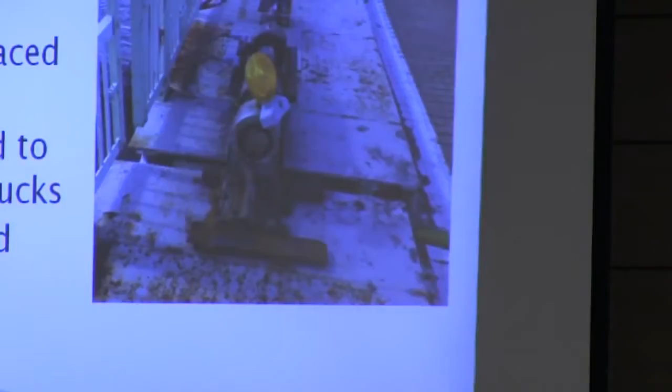We then restricted traffic on the bridge to 2 lanes, took away all the commercial traffic, heavy trucks off the bridge. We posted cops at both ends of the bridge to prevent trucks from getting onto the bridge because there is a potential for residual settlement on the bridge.

I'm just kind of giving you a history of what's going on, where we're at, and a presentation of what's going to happen, at the end of which we'll open it up to questions.

On January 14th, when we realized we had so much settlement on the East Pier, we moved construction away from the East Pier to analyze what's going on there. We moved to the West Pier, on the west side of the bridge, southwest side, close to the marina. We started work there on January 14th.

On January 23rd, we noticed that there was settlement of this pier as well. One indication of this is that the locks on the bridge, the ones that we put in the sidewalk, started to malfunction again. They don't open, so they can't pull back, and the bridge can't go up into the upright position. So we had to do some work on those locks as well to adjust them.

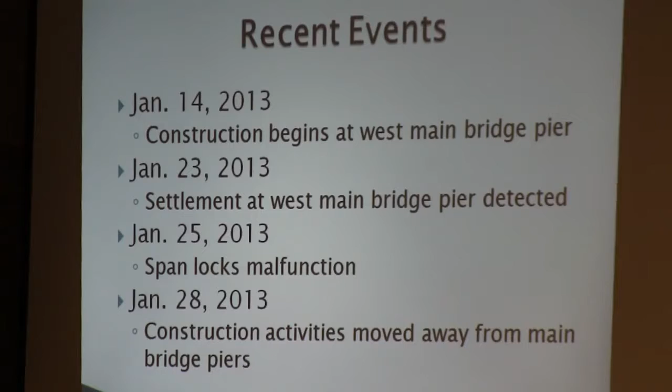What we then did is move all construction away from the main bascule piers, the ones with the leaves that open up and close. The first pier that settled is this one, the East Pier, Southeast Pier. There are 2 foundation sections to each pier, one here, one there, and they carry a concrete member that ties the two together.

This foundation right here settled 1 5/8 inches. On the west side, this one settled 1/8 of an inch, and 3/16 of an inch there. This is what I'm talking about.

When we started having settlement on the bridge, we asked our structural engineers, who know a lot about this, to analyze and tell us what would be the critical settlement on a member of the bridge, meaning what would be the critical settlement on this member here. What we came back with is that 2 inches would be the critical value. We're currently at 1 5/8.

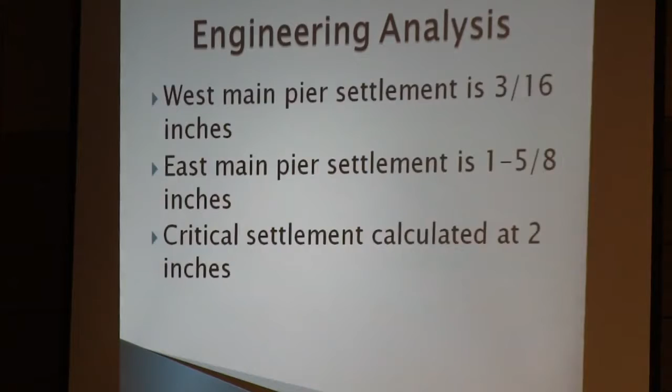This is a model of this area here, that area that you've seen circled. What we've done is model that, and did an engineering analysis of it to see what the stresses are within the structure. The key here is green is good, red is bad.

This is a structure with 1/8 of an inch of settlement, all green. We can tolerate 1/8 of an inch. This is at 1 5/8 of an inch.

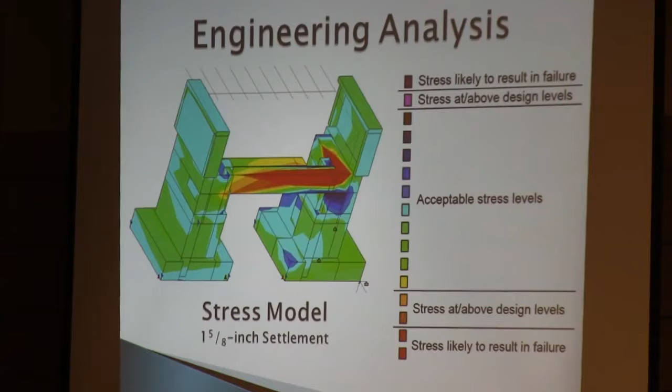That's one foundation structure, and that's the other foundation structure I showed you. This is the member that ties them together. This, as you can see, is red. That's an area that indicates stresses in this member are more likely to result in failure. As you can see in the legend, this is stress likely to result in failure. That's where we're currently at.

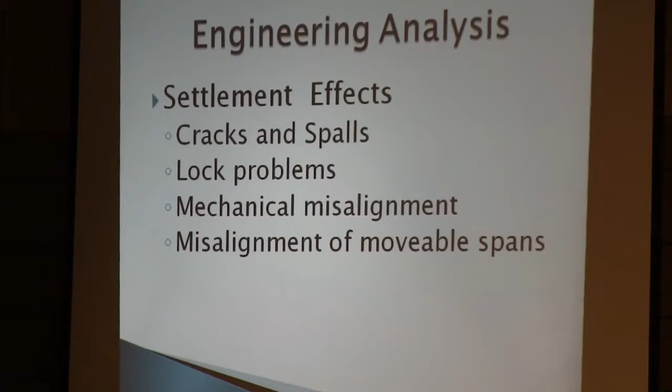What are some of the effects that we will see with settlement in the bridge? We'll see cracking. The structure will crack, and that will indicate where some of those stresses are. We'll have lock problems, the locks will bind up. We'll have mechanical misalignment, the gears and things in the bridge will not work as well as they should. There's misalignment of the movable spans, where the spans don't line up vertically or horizontally as they should, because there's 2 leaves. As you know, the bridge opens with 2 leaves, and when they don't align, that's what results.

So having said that, I'm going to show you what we were seeing out there. I've explained what to look for, what are the issues and visual impacts we'll see based on all these stresses in the bridge. I'm going to show you some of those impacts that we're seeing out there now.

This is what we call a flanking span. Technical terms, but what it means is it's a span adjacent to the channel. Over here you can see the channel on this side, that's the fender system, and this is just a span right adjacent to the channel. This is the southeast flanking span, so it's on the east side, south side of the bridge.

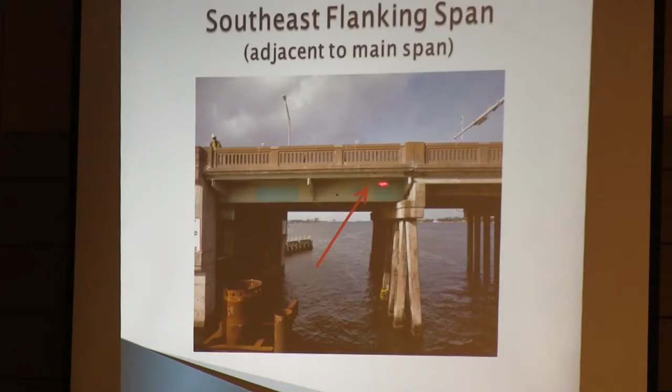What I'm going to show you is this. Up here we're starting to see a lot of cracking, I just have an arrow showing it there. I have more details of it here. As you can see, sections of concrete are starting to fall out of this section, and the cracks are pretty wide right now.

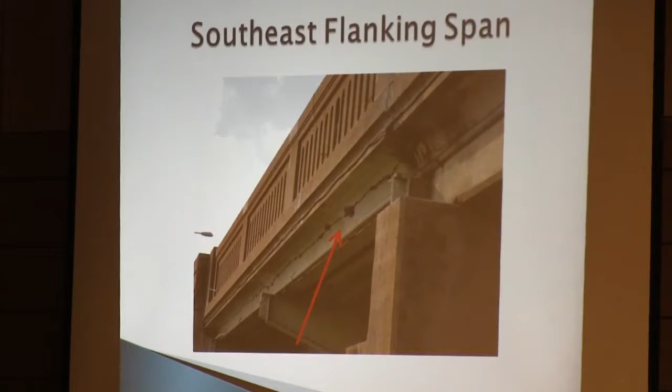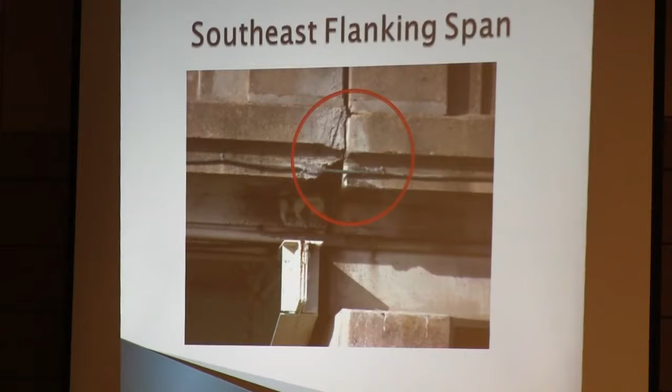This is an area also on the bridge where you can see pieces of concrete have started to fall out. These are some of the cracks that we're seeing underneath the span on that section of bridge. These are all due to settlement on the bridge.

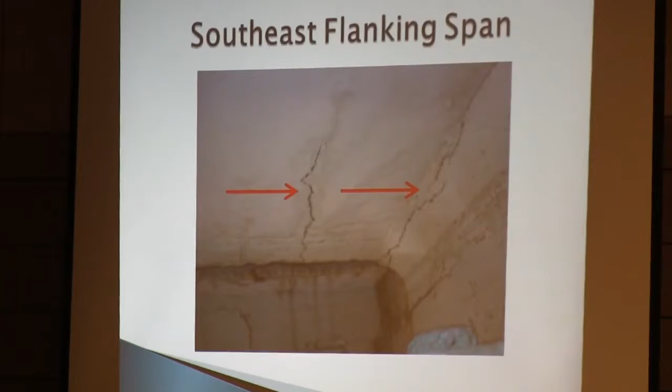This is the member that I talked about, that you saw a model with all those stresses in it. This is one foundation area, and this is the second foundation for that east pier. This is the member that tied them together, the one that had all those red lines in it. We show it over there. This is what is happening to it right now.

This is a key member, and just to explain it to you: this foundation section here, that foundation column there, this ties the two together to prevent this, so that they can both move together. It also prevents the structure from twisting. Let me get around here.

What you see up here is just a counterweight on the bridge. It helps the bridge, think of a seesaw. This is the weight that helps pull down the bridge when we open it. So this is the leaf of the bridge here, that's the section you drive on. So this comes down, when that goes up, this comes down. This member ties the two together to prevent this from twisting or moving away. This is a very key member.

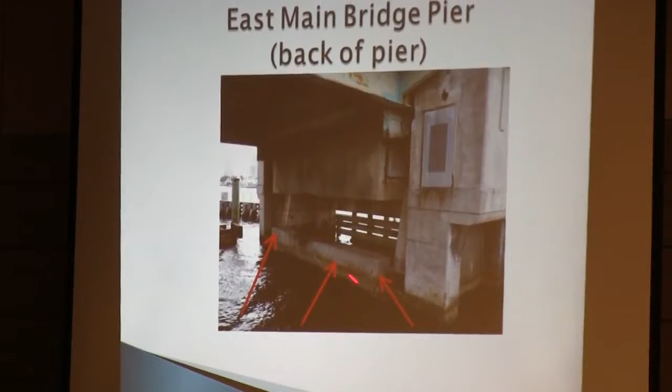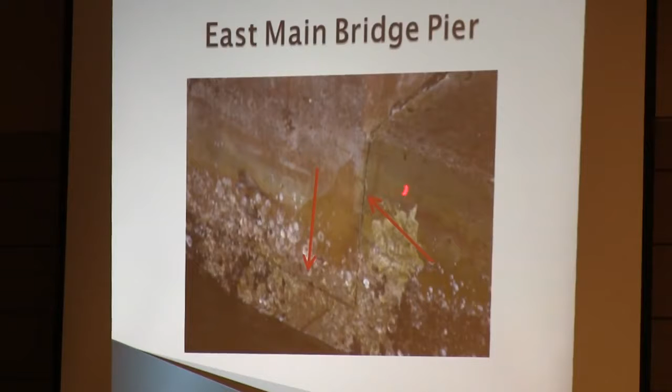That's the one you saw with all the red lines in it. This is what is happening to that member, it's starting to crack where the two come together. Where the foundation ties together both. This is that same member with all these cracks that are starting to form in it. These are all the stresses starting to show up in the bridge.

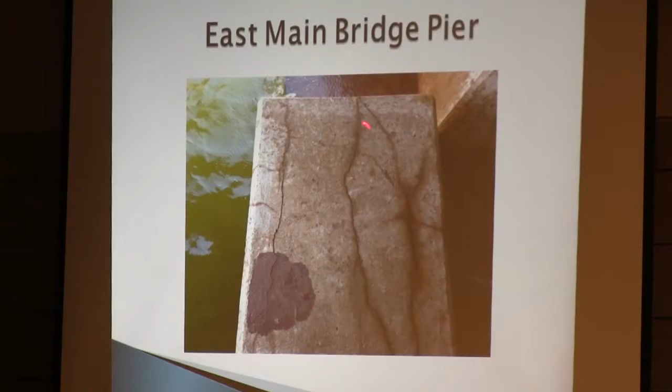When we moved to the west side of the bridge and started construction on that side, this is what we call the flanking span. It's right adjacent to where the bascules are. Right here you can see where we started with some of the drill shaft work. That's where the new bridge will be, where you see this template.

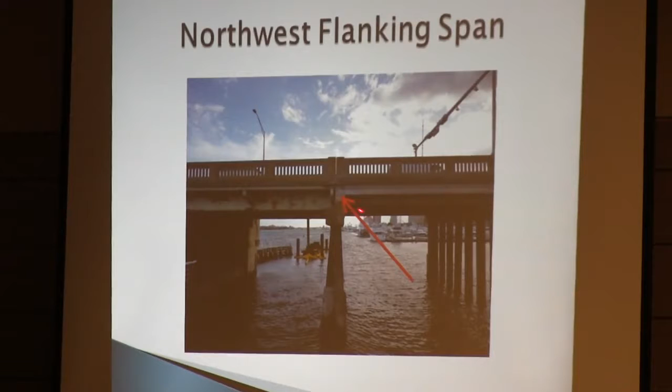This is what we started seeing here as well when this settled. These are some of the cracks that have started to form in this structure. These are some of the areas where we've seen concrete starting to break off and come out of the structure on that span that we just looked at.

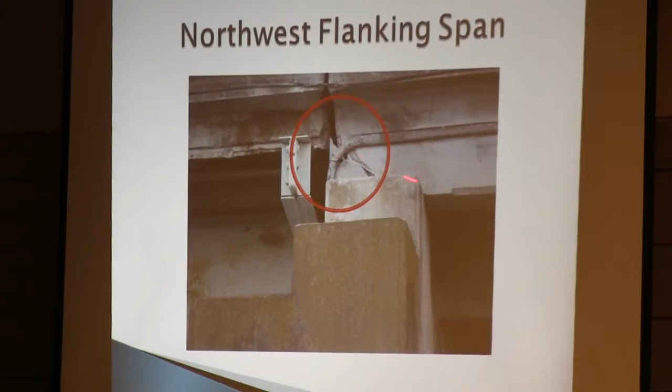These are some of the issues we're having with the span. You can start seeing some of the misalignment of the different sections. Let me get caught up here. Having to talk and look at the picture, can't see it sideways.

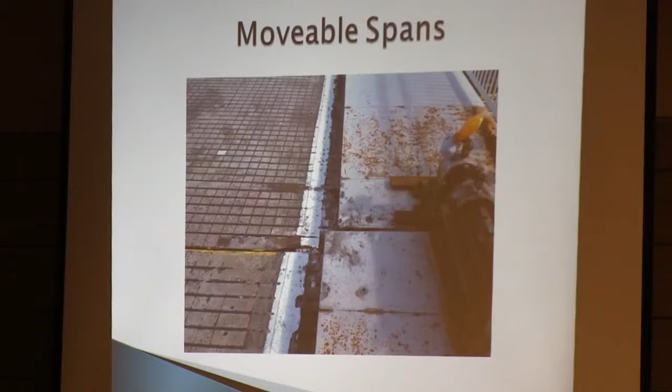I can guarantee you DOT don't lay stripes like this. This is where you can see the bridge has actually shifted and the spans don't line up. These are the movable spans, they don't line up. That's the actual visual shift you're seeing that's going on when the structure settled.

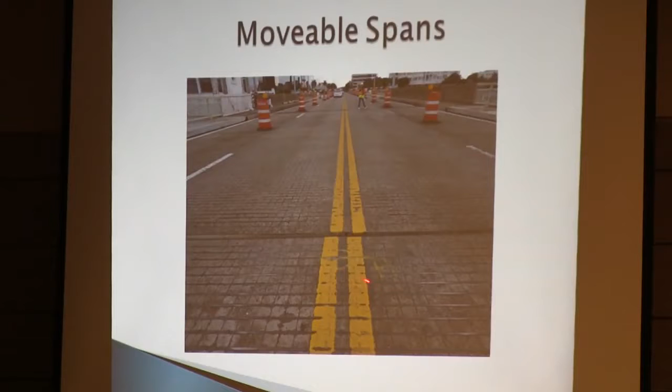This is some of the vertical misalignment that you're seeing. This is where one span meets the other span. This section goes up, as you can see.

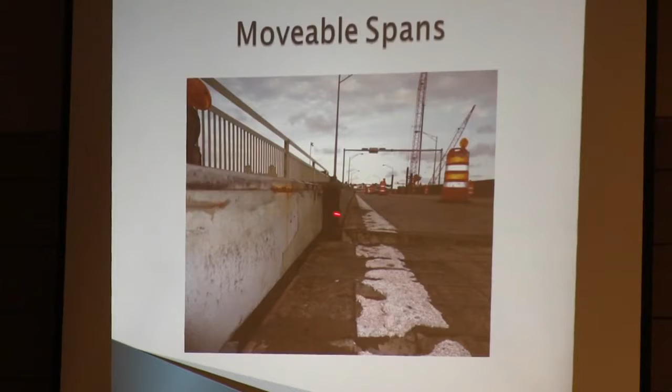Those are the lights that tell people to stop. We don't go up when they're on the bridge. This is where the edge of the sidewalk, both pieces should line up. They don't - you can see right through, both vertical and horizontal.

Here's another picture of that. You can see the gap here on the outside edge of that leaf. That is a vertical misalignment. That's also vertical and a horizontal misalignment.

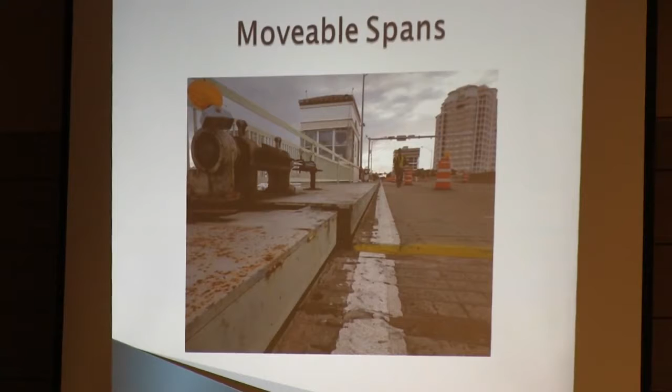That's all results of the settling. We talked about how the analysis would tell us that these things would happen. We're actually physically seeing them in the field. This is a visual reminder of what's going on.

When we looked at all of that and what is going on with what we have to do and what remains to be done - we haven't really started any bridge construction on this bridge. We have 108 drill shafts to put in. We've only put in 6, 2 adjacent to the structure. We've seen this much damage to the existing structure.

We recognize that this has become a safety issue. The minute we start to work out there again, we're going to have issues. The structure is going to settle.

We've looked at many alternatives. We've been asked to, and we got some suggestions as well from previous meetings, and we've looked into those. I'm sure there'll be a question on one of those, and we'll be happy to answer those when we get there.

But we've analyzed all the structure, all the options. We've run out of options. The only option that we have that ensures public safety is full closure of the bridge, accelerate the construction to get it done. This is the schedule that we're looking at here, and I'll give you a little idea what it is.

This is where we'll be working on all the foundation work. We'll be having 2 crews out there, working both from the east side and the west side - from the town of Palm Beach side, and from the city of West Palm Beach side. We'll have 2 sets of crews operational out there, 2 sets of equipment, and we'll be working.

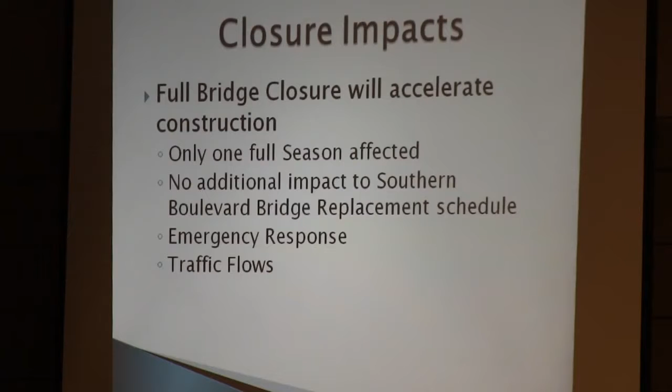I understand, we recognize that a full closure is going to have a much greater effect on the community and businesses. So we have a plan that we've put in place. To discuss that plan, I'm going to ask Mark Plass, our traffic operations engineer for District 4, to come up and talk a bit about that.

Taking any questions? We will, after Mark's presentation. I will answer every question, but first let me punch up a couple of things that Courtney said.

Pretty dramatic pictures. Is the bridge safe to drive on? Yes, right now it's safe. We would close it if it wasn't safe. We believe that, we're confident of that.

We also believe it's not safe to drive on when we reinitiate any kind of foundation work that creates vibration. So we've suspended that kind of work. When we start it up again, we're going to have to close it.

Why do we believe we need a complete closure? Because when we close the bridge to start the pile driving again, we expect it to settle some more. If it reaches 2 inches instead of 1 5/8 inches - only a very small margin - our conclusion is at that point it is not safe to drive on, even if we're not doing pile driving at that time. It's no longer safe if we get just a little bit more settlement. So we're confident that with any more foundation work, it's going to settle more, and it's not going to reopen after we start the foundation work again.

We've also been asked, well, what if we're wrong? What if it stops settling and it's never going to settle again? Well, we'll find that out when we start the pile driving. If the bridge doesn't move, then we'll change our plans - we've still got a bridge there that works. I wouldn't hold out any hope of that though. Everything indicates to us, with only 6 foundations in and so many left to go, this bridge is going to be destroyed during the construction, and that's unavoidable.

The first thing that we're doing is we've gone out and taken a preliminary look at all of the intersections and sections of roadway on the diversion routes in the town and the city. This is our best estimate of what these routes are going to be.

We're going to learn more after the bridge closes. But the reason we did this is that there are a number of intersections where we believe we could make changes right off the bat to signal operation and other traffic controls, like turn restrictions, to help traffic flow more efficiently locally.

Some of these changes may become permanent. I think we'll learn that some aspects of traffic control at intersections within the network have existed for many years and maybe need to be revisited. This is the opportunity to make these intersections work more efficiently and simply leave it that way after the bridge opens.

So my office has gone out and taken a preliminary look at the intersections on the diversion routes. We're going to continue to look at those intersections with representatives of the town and the city, particularly the police departments, because they have intimate knowledge of traffic patterns, more than we know. We want to take advantage of that knowledge to better understand what's going on today and what changes we can make at the intersections themselves. So that's the first thing we've done.

The second thing we're planning to do is what I'm calling active traffic management. We have the network I've described. It's basically going to consist of Okeechobee, Southern Boulevard. We may look at Lake Worth Road as well as a potential outlet.

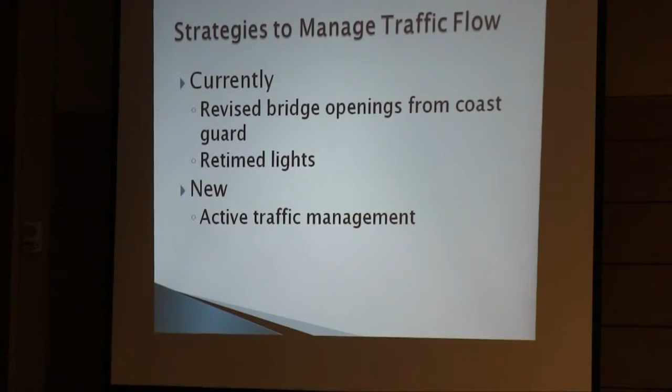If there's incidents in the network that we don't want them driving toward because it's going to create additional congestion, we're going to notify them before they leave I-95, and ideally give them alternate routes, or at least let them know if you go this way, there's more delay than a different way. Our goal is to get phase one operational by the end of this month.

We already have staff in the TMC that's been training on how to manage arterial traffic. They've had training in the cameras we're using and the systems we're going to be using. Now we're going to focus entirely on this network with this staff. We believe by the end of this month we'll be up and running with staff in the TMC to monitor this network and cameras deployed to help them do that.

In addition, we're going to start working immediately with our partner agencies to establish what we call the operational protocols. How are we going to manage this network? What are the chains of command? What are the rules we're going to use? How are we going to analyze new ideas that people bring to us to improve traffic flow? We've got law enforcement, fire departments, emergency responders, the railroad, the Coast Guard, and so on. It's important for us to develop the protocols, the rules, by which we're going to manage this network, because there are a lot of different entities involved.

Starting this month, or starting in March, we're going to begin doing that. And we're going to continue to refine these protocols throughout the duration of the bridge closure. We're going to get better and better at doing this, working together as a partnership.

So by the end of March, our plan is monitors in the TMC, the initial deployment of cameras in the network. As we learn more about the network from our partners, we will likely deploy other camera equipment at other critical intersections and sections of the network until we have an optimal deployment where we can see what we need to see when we need to see it.

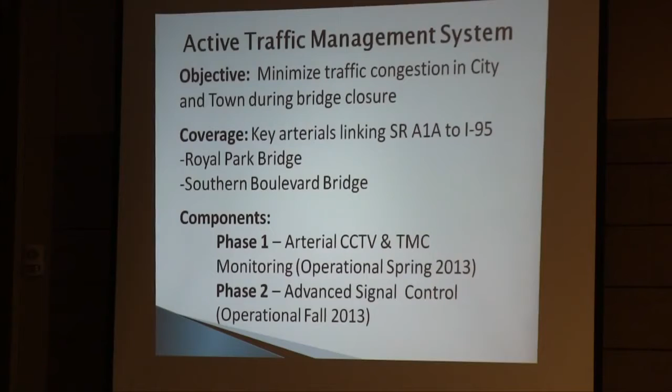We will be producing performance measures for this network that we're going to report on a regular basis, so people have an understanding of what kind of return we're getting for the emphasis we're placing on managing the network. This will be done as part of the Traveler Information Program that we're going to be providing.

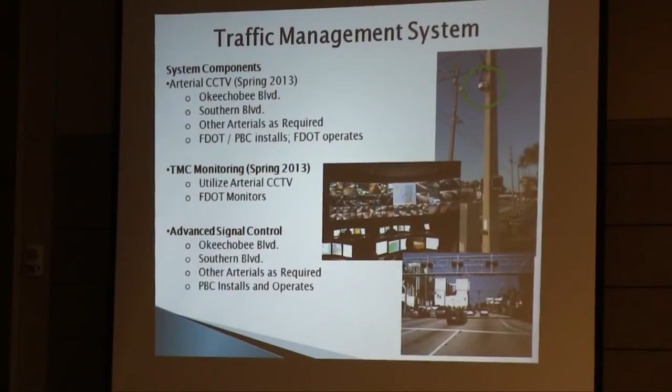Okay, so this again is a synopsis that shows some pictures. You can see roughly what these cameras look like. The camera's got the green circle around it. The Traffic Management Center, that's not exactly what Palm Beach County Center looks like, but it's pretty close.

It's a building, it's a network. It uses the Traffic Management Center's capabilities to reach out to the partners to better coordinate incidents, or the response to incidents, coordinate the deployment of law enforcement officers to manually control intersections, contact the railroad in the event there's issues there, the Coast Guard in the event there's issues there, the contractor who's doing the bridge work. You name it, we can contact them from there. This is the partnership's brain, if you will.

The system that I've noted, which is the cameras, the advanced controller equipment, this can be reconfigured. It can be rearranged, relocated to other intersections if need be, very easily. It can be expanded if need be, very easily during the course of this process.

I think it's important to recognize, and I want to stress again, that this is going to be a learning process. I'm not going to tell you that right out of the box on day one we're going to be operating this network optimally. Because of the partnership, we're going to learn how to do it better and better. We're going to get feedback from the partners, feedback from the public. We're going to value that feedback because it's going to help us get better faster at doing this. We're going to report back to everyone on how well we're doing based on the feedback we're getting. So the partnership is really key to the success of all of this, I believe.

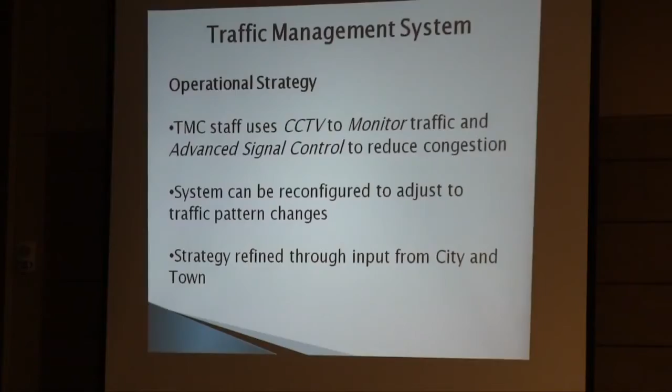So to wrap up here, we have a challenge to manage this traffic. There's been about a 40% reduction in capacity just in the links between the peninsula and the mainland. We've got a defined network that we can manage. We can use the technology, we can use protocols that we establish to help us use the technology. We can take advantage of the partnership that we have with the town, the city, the county, other entities. We can take advantage of the ideas that our partners have to better refine this network to make it work as best as possible during this period of time.

I think what we might find is that at the end of the 14-month period, when the new bridge is open, we might find that some or all of what we've deployed we want to leave permanently, because it's worked well enough that we want to make it a permanent component of how traffic is managed in the town and the city. So that concludes my remarks. Thank you very much.